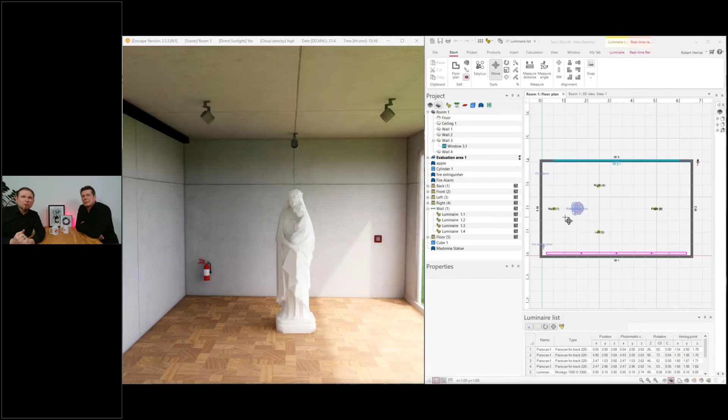In ReluxNet we have a 3D object catalog option, and this statue is from our ReluxNet 3D object library. So it's almost the same scene.

Here's a standard situation - in Relux 2D, we have on the ceiling 4 spotlights, and we have 1 light on the bottom. Let me try to show it to you.

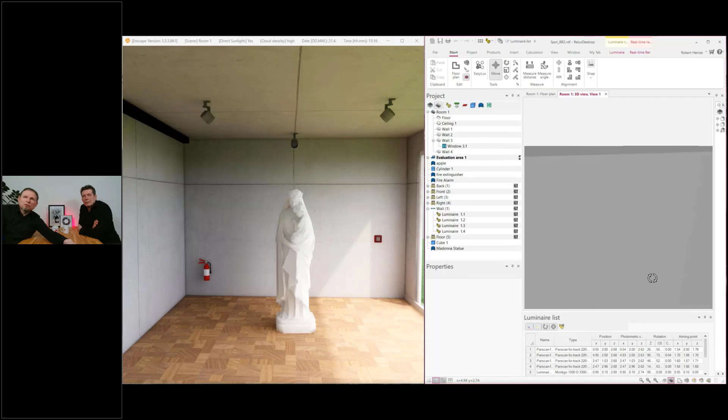It's not easy. Here we have a luminaire on the floor, also to show what happens if we have light from the floor. Mainly lights are coming from above, which is also a good choice. Here we can try out and find the best solution to illuminate and focus this statue.

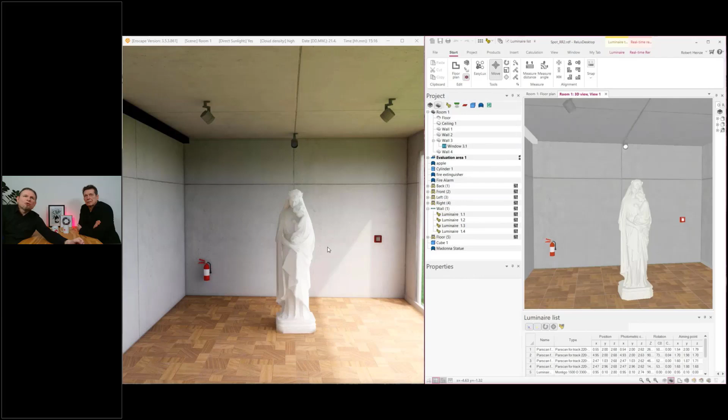So the job is to focus the statue. Before we go into this, here is the real-time rendering. You can enter real-time rendering in ReluxDesktop just by this button. Give it a try - it's free and it's fantastic, especially for these focused light situations.

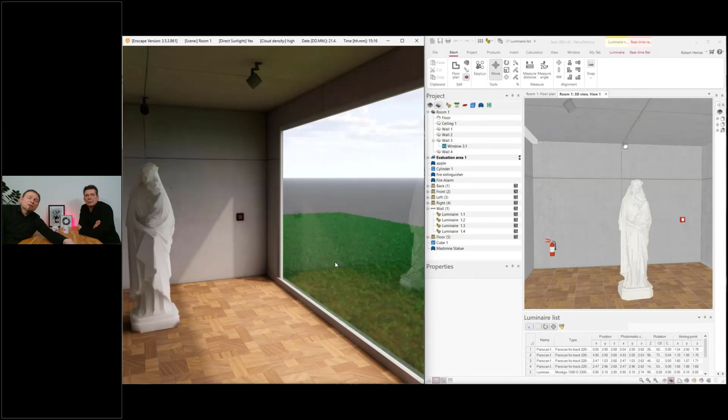If we want to start, we need to switch off the sun. The sun is one of the brightest sources ever, so it's really hard to compete against the sun with anything artificial - don't even give it a try. It's impossible to deal with sunlight. If you have daylight, it's impossible to make focused light.

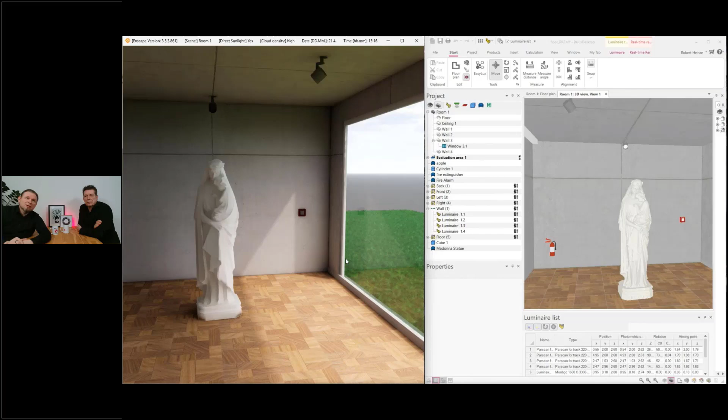Depends if you can shut down the natural lights, then you can have some effects. It's the same with projection and so on. The sun is just a really high source of light energy, which is fine in a lot of occasions, but to have contrasts, sun destroys all contrasts.

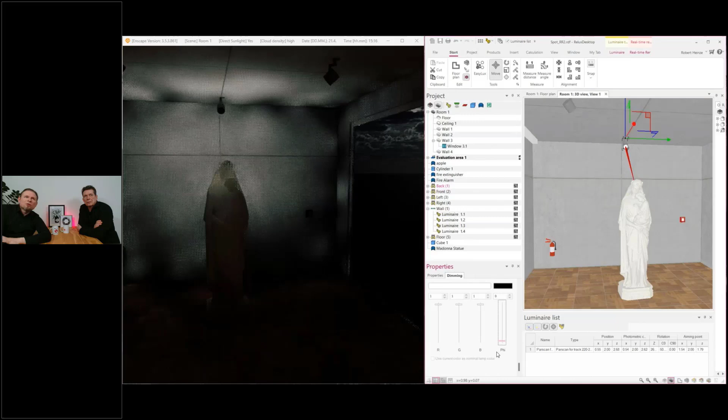Okay, I'll make it a night situation here. So now we have night, and we can also see we already have an active spot. I just want to go down with the spot and show you one spot after another. Now we have a beautiful night scene, which is good.

I want to start here in ReluxDesktop by showing you the options for what we can do with spotlights. Most of the spotlights come with some options to align, to adjust, to have a tilt and aiming - not just tilt, but orientation in rotation and tilt.

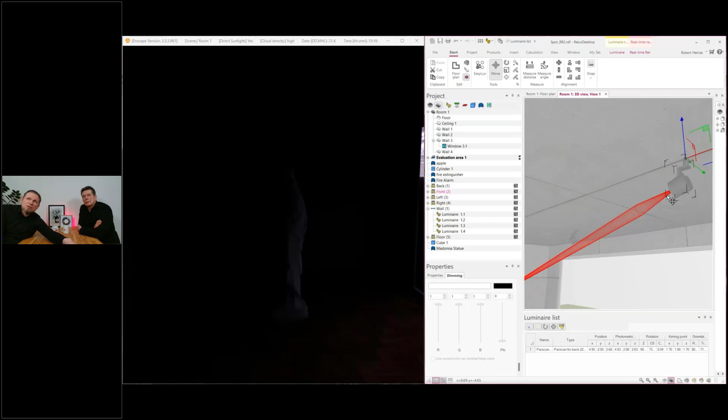So you need to adjust the luminaire with the spotlight, especially if you have sharp focused spots like I have here. This is one of the most sharp spots I could find in our ReluxNet library. I guess this is from Erco. This is about 2 degrees or something - really, really focused, really, really tiny.

And this is great - a tiny spotlight is fantastic if you want to have a focused, shadowish light. If you want to have high contrast and high gradients to the rest, then this sharp spot is perfect and casts a lot of shadows. You have more shadows with a tiny spot, a tiny source. If you have a big source, then you have less shadows.

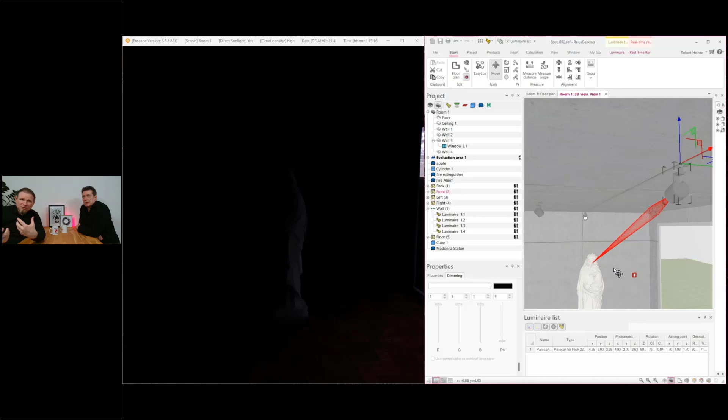And sometimes you want to have shadows. Shadows give a deepness of objects, bring objects into the 3D stage, make it plastic, more useful shape. With shadows, without shadows, everything is flat and boring and simple. Shadows are a kind of high contrast element you should be aware of when you're going to focus light.

That's why in focus light it's good to have as tiny as possible sources for the light. And the size of the opening angle depends on the size of the objects. So of course, if you have a tiny object, tiny focus, but it also makes sense to have a wider opening angle version if you have a larger object.

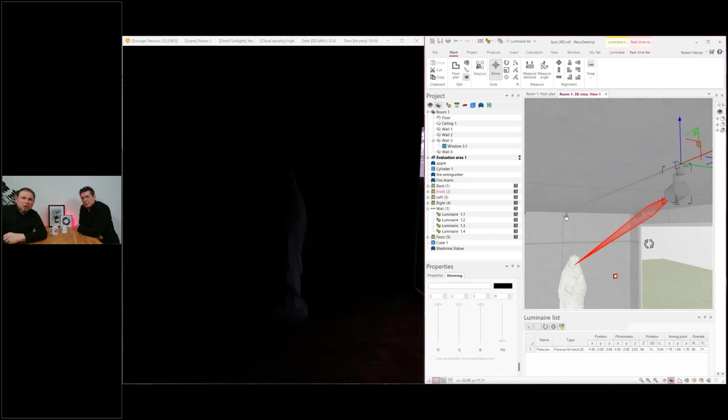And the distance also plays a role. Here it's quite tiny - this is one simple small room, and that's why a sharp focus is needed here. I can demonstrate more if it's sharp, if it's wide.

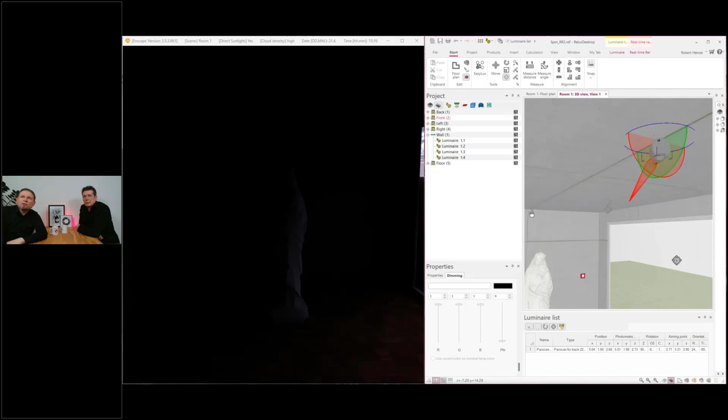Okay, then we have options here to adjust it. This is something really nice in ReluxDesktop - you have this aiming tool. If you select the luminaire, then you can literally aim the light, the focus. You can aim, for example, to the wall, to the ceiling. You just click where you want to have the focus, and then the luminaire - and also the geometry of the luminaire - follows what you want to highlight.

So, and you can also pick one of these and rotate it. It's not the best rotation I've done here. Yes, this is a better example.

Yeah, of course it's also here. And here we move the complete luminaire. This will break the luminaire here on this socket.

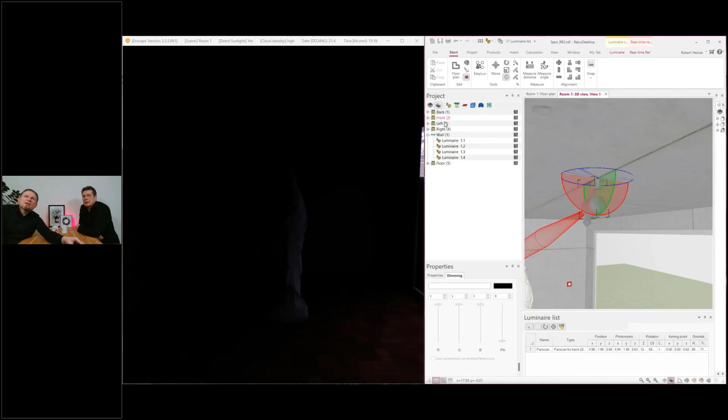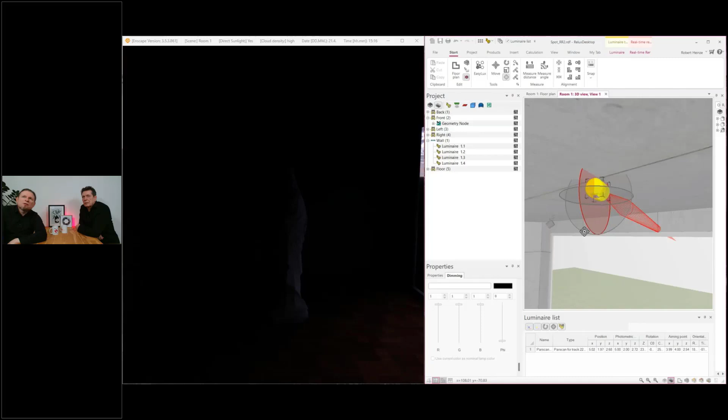That's why we need to switch this one, or here I can also select directly the head of the luminaire and manipulate it here directly, just the head without the arm, let's say. And with this focus light element, it automatically makes it just rotate what is possible to rotate - just the geometry, just the look of the luminaire.

But of course, if you have an aesthetic room, it's also important that you have an aesthetic rotation and tilting of the luminaire according to the geometry options of this. So, okay, but let's focus again on the statue.

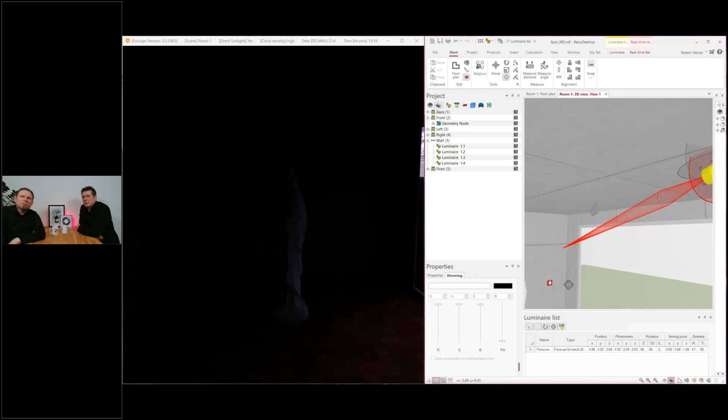Something like this. Okay, there's also tons of options in regard to displaying not just the LDC, but also aiming arrows. This makes sense in a lot of occasions.

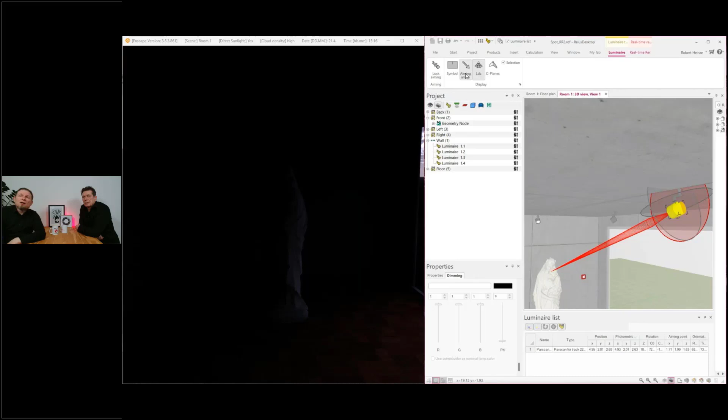Also, you can adjust the LDC a lot. It doesn't have to be this LDC. You can also adjust it in the settings - what is the size about this? So there's a lot of options. I will not go deeper.

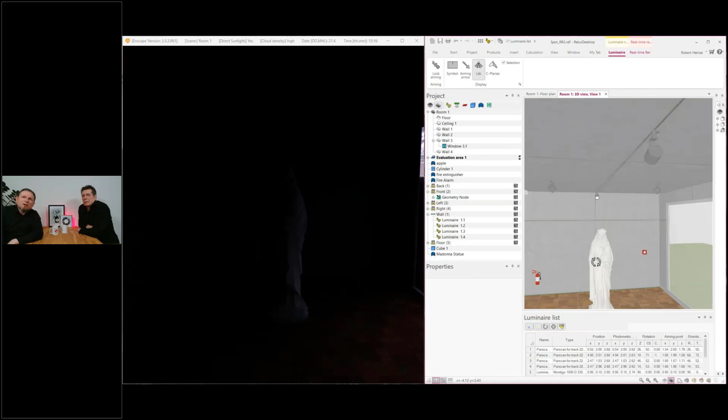Maybe Klaus has some time to show you a bit about the aiming options. I want to concentrate here on what the direction of light has, which kind of focus. And I can really recommend a book if you're interested in shadow, in direction of light. There's a book from the manufacturer Erco called 'Handbook of Lighting Design' - quite a generic title. This is an older book.

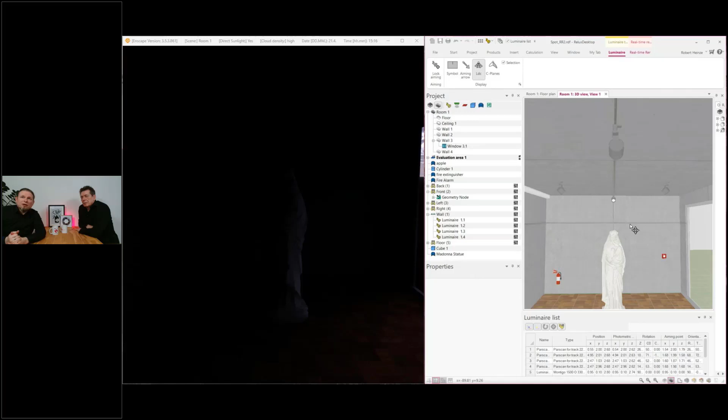It's not available anymore in a print publication, but it's available on the Erco website. There's an option to download the PDF of this book for free. You just need to sign in to Erco, and it's also free. It's available in English, Spanish, and German. This is one of the best sources I've found regarding focused light, directions of light, and the effect of different light positions.

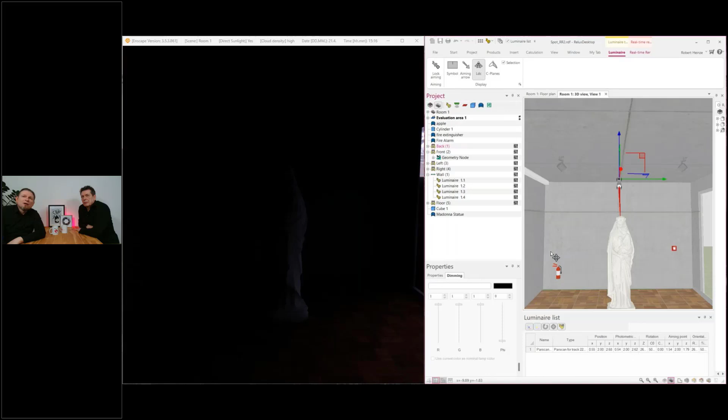Let's start with investigating different directions of focused light, beginning with the back. With light from the back, you can't see the front directly. You just see some aura, something in the way, a cast shadow, but you cannot really recognize the face or front. You see something with an aura, a glimpse between the shapes, and this is something mysterious and unknown, not really recognizable. This isn't used quite often, but it's an element worth considering.

Back light combined with a back spot helps a lot to make the object more plastic, more 3D. If we turn it up more, we see more back spilling, more indirect light, and more of the wall on the back. One option is to eliminate the wall on the back, which has a similar effect but without the strong shape on the edge.

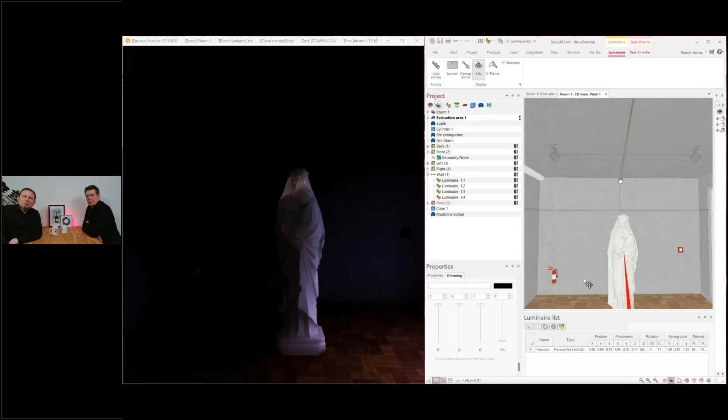Then I have one luminaire from the floor, so light from below. Below is something really weird. If you switch it on, light from the lower part feels unnatural. Light usually comes from above, from the sun and sky in diffuseness. Humans are used to that. If you have focused light from below, something feels wrong, not natural. It can even horrify or scare people, especially with faces, since light from below looks strange and not real.

You may have seen this before: taking a flashlight and holding it below your face to horrify children on Halloween. You get a spooky face with focused light from below, with cast shadows in the face. It's not really visible well here because the face is too far away and the angle is too flat, but with a stronger angle from below, you get more of that spooky effect. Combine it with green light and it's really spooky. This isn't commonly used, partly because it's awkward to install something on the floor, though it does help prevent some shadowing. Light from above is more common, especially with a front luminaire, which is the straightforward situation to illuminate.

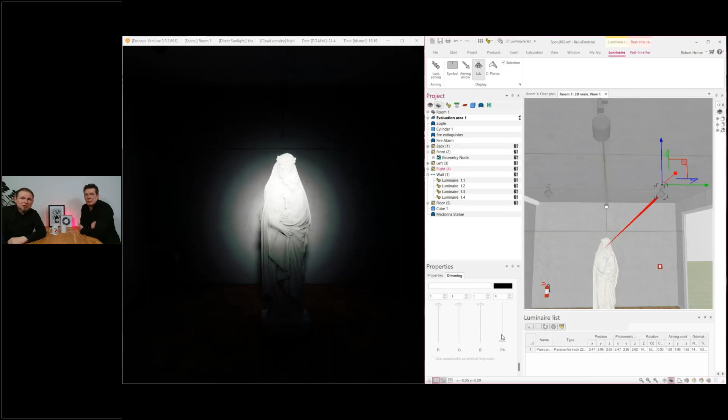It can be just flat and look simple, not really three-dimensional. This can be helped if we add some lights from above, from the sides.

So this is also quite common, especially on statues, on faces, that you have some light from the sides. I will turn on lights from both sides—this also helps to prevent shadows. Maybe it's a bit too strong, so I'll also turn the front off. Now we have just lights from the sides. This makes objects more plastic, more dimensional.

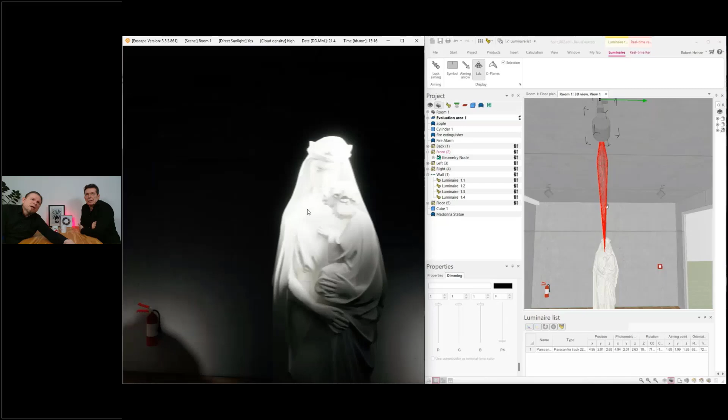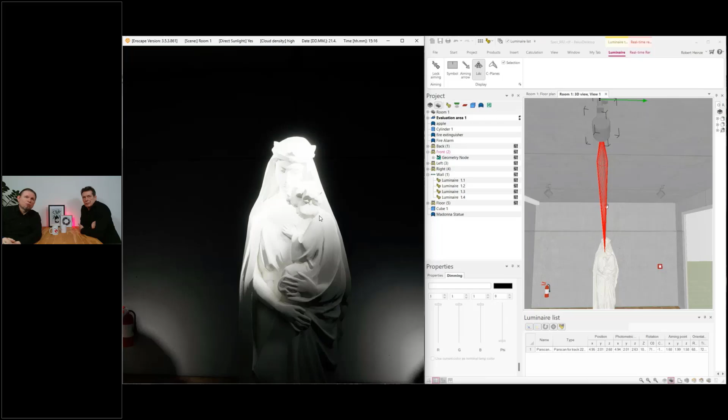We can see different kinds of shadows. We have not just one shadow, but a mixture of different shadows overlaying each other. If we combine multiple spots from multiple directions, this makes the object more plastic. We can really see all the tiny aspects of it, in contrast to just one source of direction, which makes the object more flat.

Maybe I can show this by bringing back the front a bit. You can see it's now more boring, more flat. If I just put the front on without the sides, it's hard to see—maybe it's another kind of shadow from the front. So if you have issues with shadow, if you don't like shadows, combine multiple directions of it.

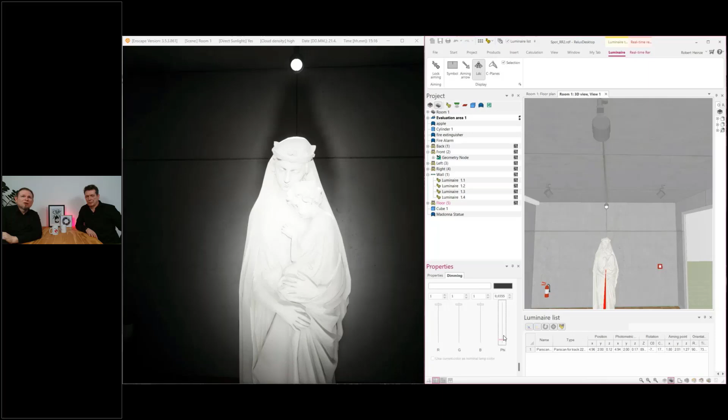But this is something you need to adjust on-site, which you need also to dim on-site. This is just a rough estimation in this visualization—it's not the real world. So you cannot take these dim values on-site and expect the exact same effect. This doesn't really work; you have to do it on-site to dim, to steer into the situation you want to acquire.

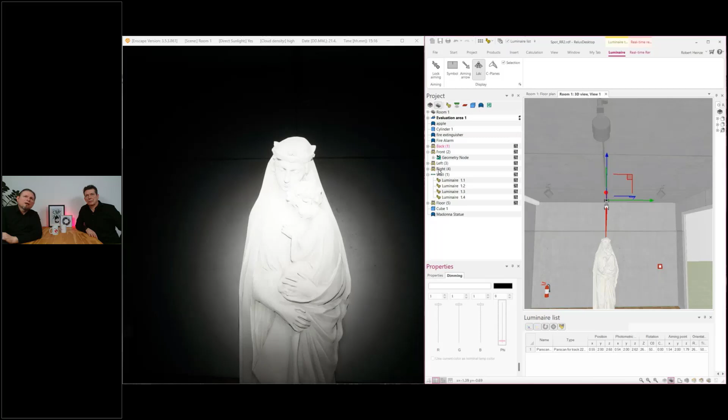What is also possible in RELUX is to colorize. I want to do this just roughly, maybe with one light—let's take the front one and make a color of it. It's possible here to dim, though I guess not directly here—we need to change the RGB slider. Okay, now I'm in the mode, and now I can pick a color.

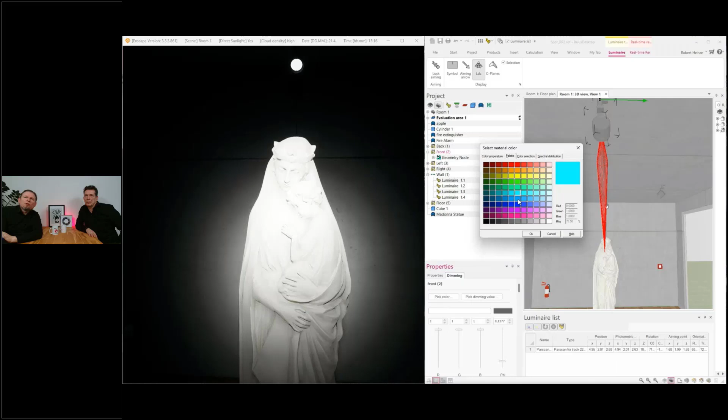Now I want to find where I can do it—it was working before, now it seems... okay, sorry, it's just on the other screen. This is what I was searching for. Here we can set a color temperature to it, maybe more warm whites, or a specific color, also in spectral distribution, and put it to it.

And then you can also try to work with colors. This is a bit advanced—I would not recommend doing any colors. It's really hard to deal with colors in an aesthetic way. Let's keep it short—it's quite powerful.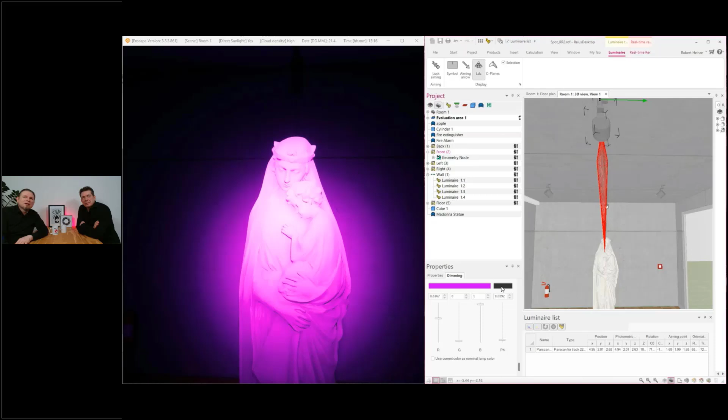So be careful. Do it here in the background—on the background it's something different. But if you make a focus spotlight with color, be careful, it's powerful. You can do a lot, so do not mix up too many colors. Stick to one, just some simple warm white or cold white.

It's mindful enough. Okay, this is the situation with focus light, and of course in contrast to focus light there's also diffuse light, so it makes sense to add a bit of diffuse artificial light into the room to see the rest of the situation a bit. This is something where you can play with the contrast, how much focus you want to spread, and this is more fun if you have multiple statues—you can say, okay, I want it equal, or have a highlight on one statue, whatever.

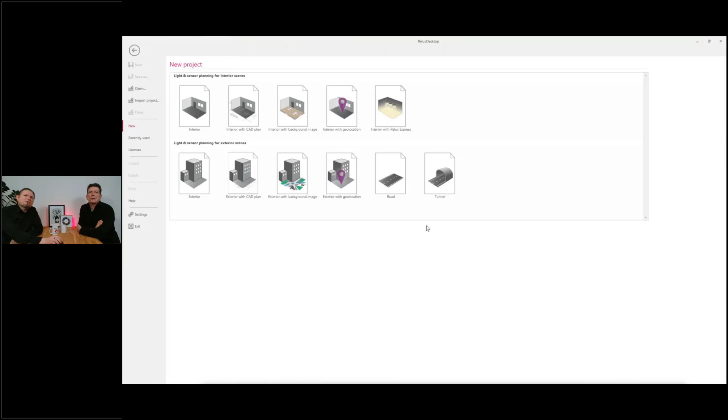You understand the story, okay. Good, enough time for indoor—let's move to an outdoor scene. I'll help Klaus by opening up the next file we have for you. Just want to show the situation when we are here.

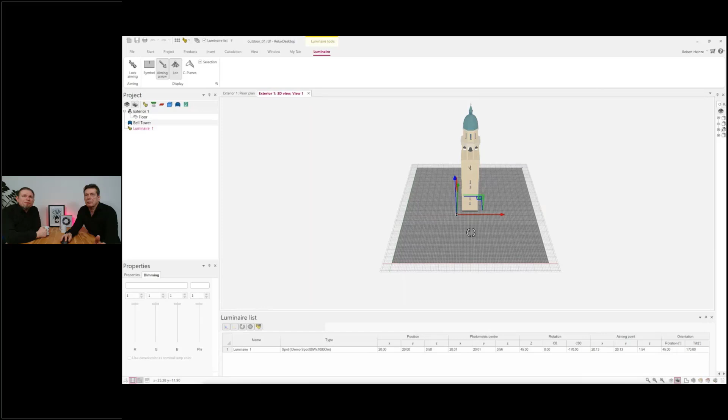From help, here you will find the sample projects Robert told you about before. From here you'll find the spot, the one which Robert has shown before. But now here we are in an exterior scene. I have a simple object here which I downloaded from ReluxNet, an architectural object. We have some in our library on ReluxNet, but you're also able to download any kind of 3D model, or construct complex models of buildings or facades inside Relux. Everything Robert told you before is also valid for exterior scenes.

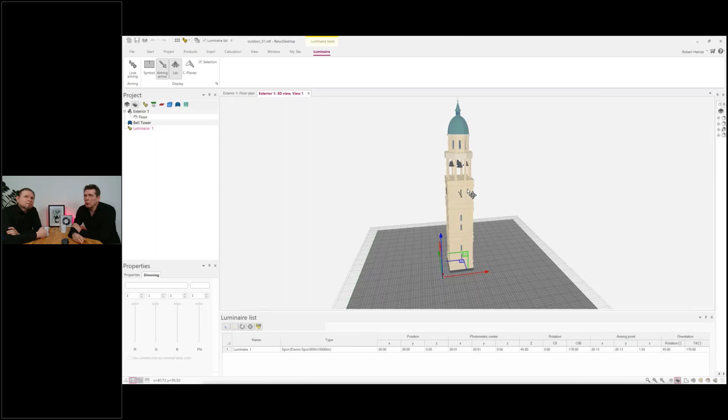There's not really a difference about these rules and possibilities for aiming and controlling the luminaires. I first want to show you, or remind you of, another feature inside of Relux: the mirroring groups.

We normally use this in exterior lighting for sports places or similar situations, but it's also useful for focused light or illumination of facades and buildings.

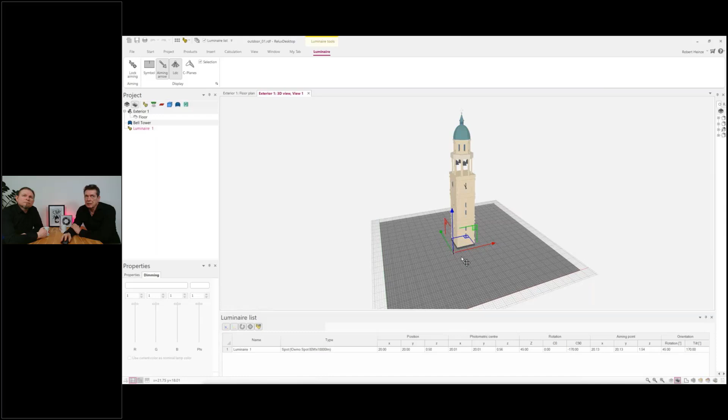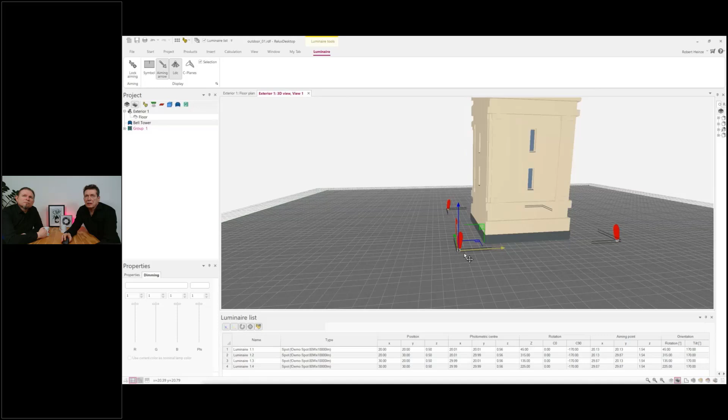For that, I will now create a mirroring group around my tower, around my bell. This has the advantage that I can simply change the tilt angle - that's the properties, not the dimming.

You have the possibilities here too. When you go down, you will find the option for orientation, rotation, and tilt. This has the advantage that, as you've seen before in the interior scene, you have different levels - the highest being the mounting level, so you can install your spotlight on the ceiling or floor, and adjustment happens via inner rotation of the luminaires. This is handled automatically in these controls, which is the advantage of using them.

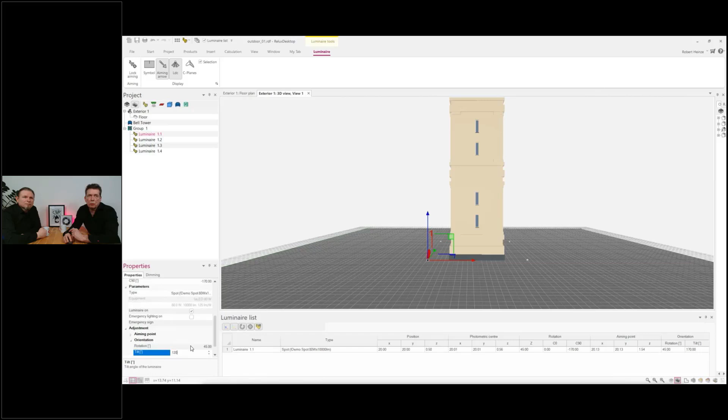Now the advantage of this mirroring group is, for example, I'll do something extreme: I change this to 120 degrees. You'll see that all the other luminaires around in my mirroring group now have the same tilt angle, so it's easy and may be helpful in some situations, also for focused light. I'll switch back to the angle before, 170.

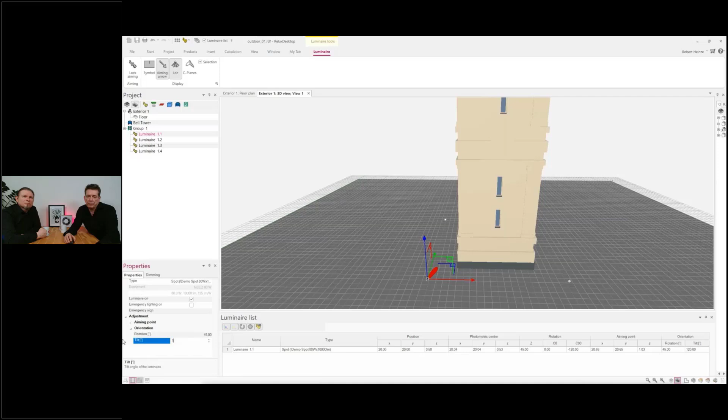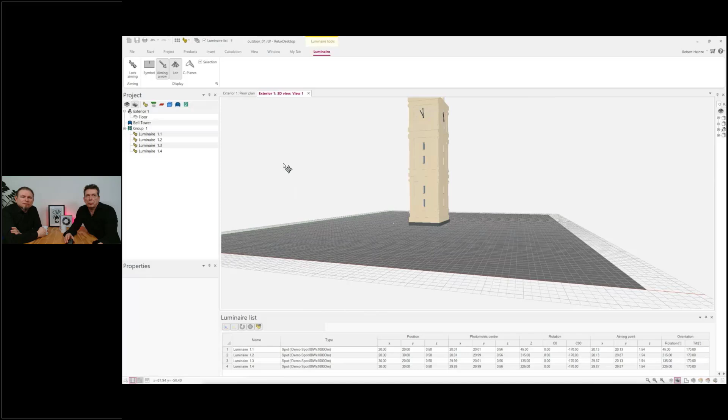There's also a minor issue here - not really a problem - because we are shooting into the sky, so the size of the LDC and the arrow is limited. You have the possibility in the properties of the 3D view to change this manually if needed. If you're inside a room or hitting an object, there's an option for the size to be calculated automatically.

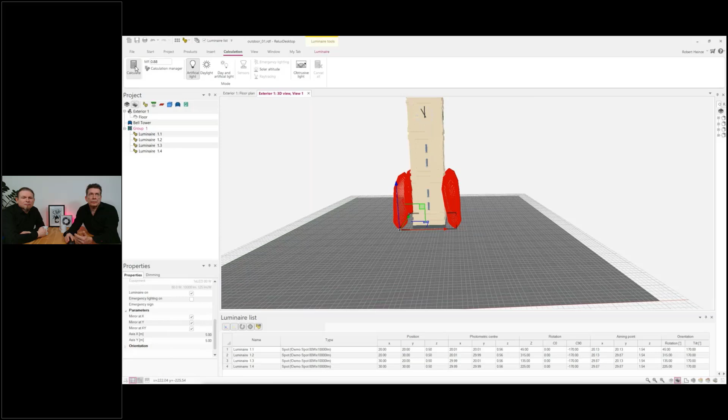If I now run a calculation - it's running on another screen. Now it's done. We will see the results of the symmetrical illumination. We can also see the 3D false color values, which give us an idea of the levels in each part of the room. We'll also see that for really good illumination, some light at the top may be missing, so this is related to the design.

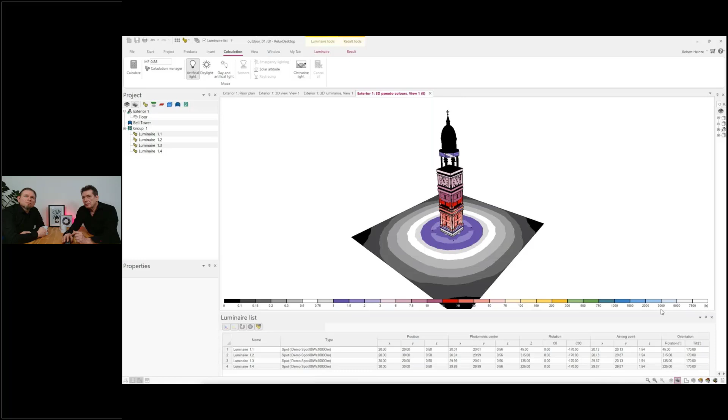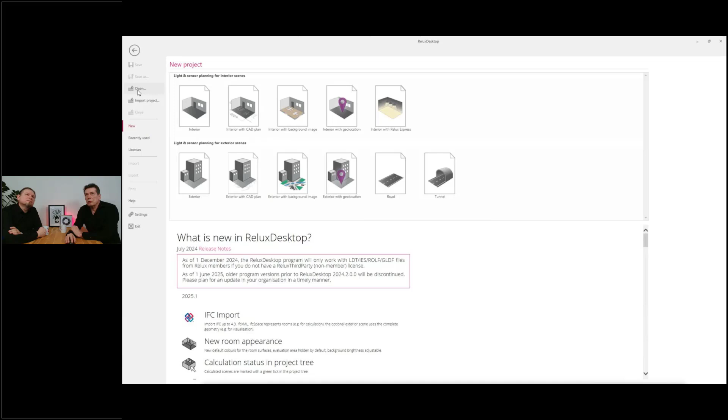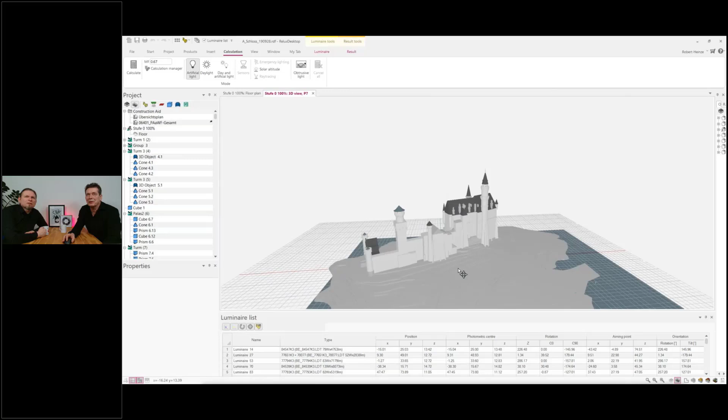Now I want to show you an exterior scene, with a big thank you to the planning office Bamberger Ingenieure, who gave us a project we can use. You may have seen it when starting the latest version of ReluxDesktop in the pop-up screen - a picture on our splash screen of this castle. It's very famous - this is the most famous German castle, Schloss Neuschwanstein in southern Germany. This was planned by Planungsbüro Bamberger, and thanks for providing this model.

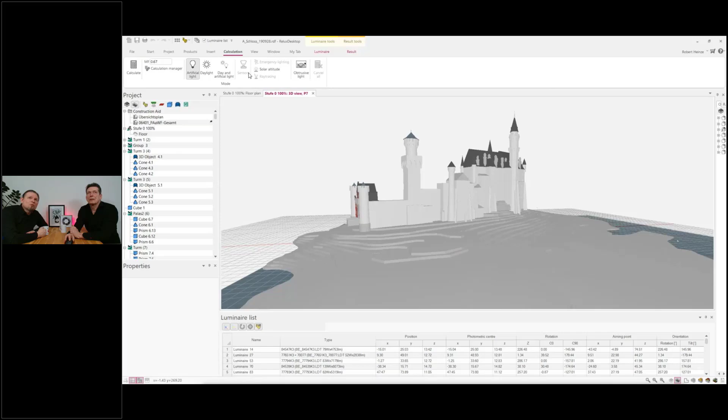This is constructed, as we can see, really just in ReluxDesktop with 3D objects. It seems so - great work so far.

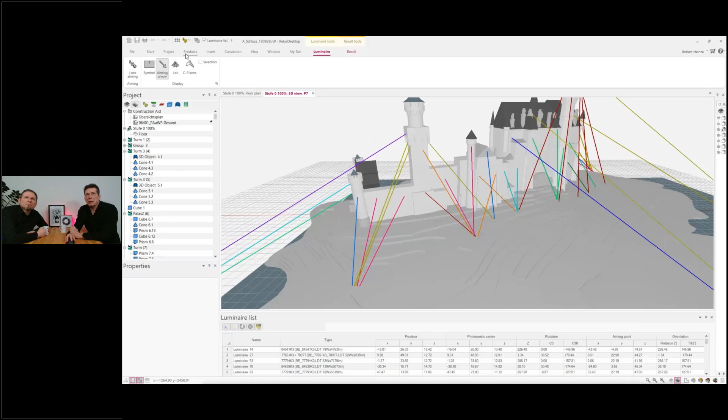Here we now see a lot of focused light on this complete building. This is also helpful because, depending on the product being used - and there are a lot of products in it - you can define for each type of luminaire the color of the arrow, which is very helpful when working with more complex scenes. We also have the possibility to adjust the arrow related to the LDC.

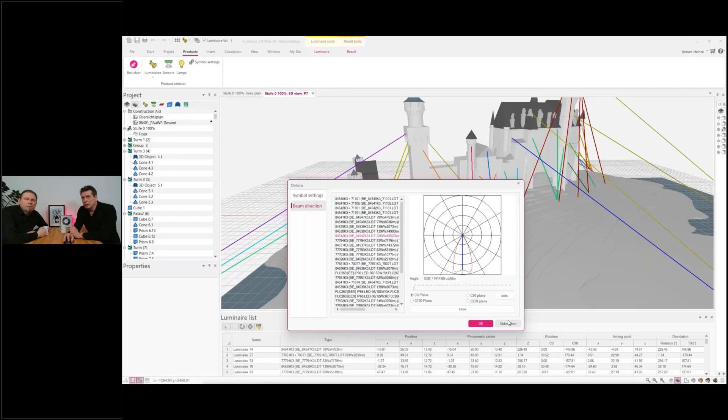This is especially important when working with asymmetrical floodlight. Normally it's just Imax, so the maximum, and the program will automatically find the correct value. But in some situations it might be helpful to know there's a point where we can change it.

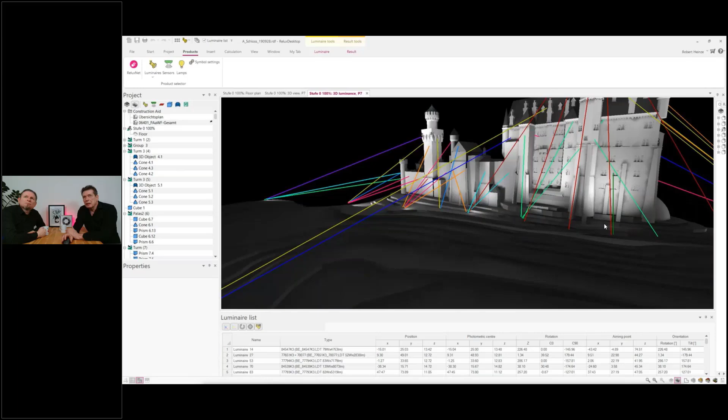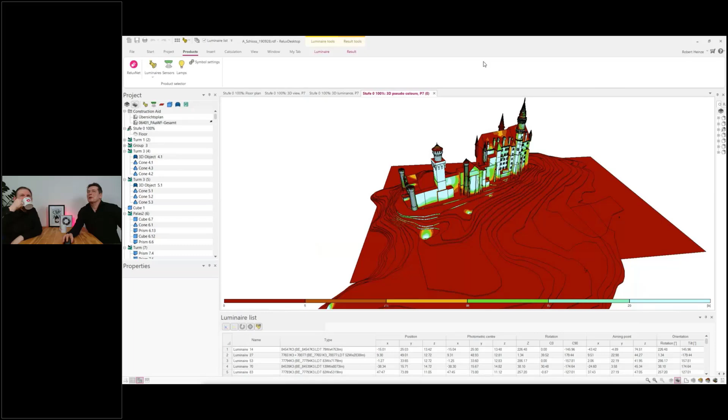If we take a look now, this is the view in ReluxDesktop with the radiosity calculation. We can also check the results in 3D false color - looks like really classical false colors. It's not our new false color scale, but I guess it's stored in the project. We can also use the more modern style.

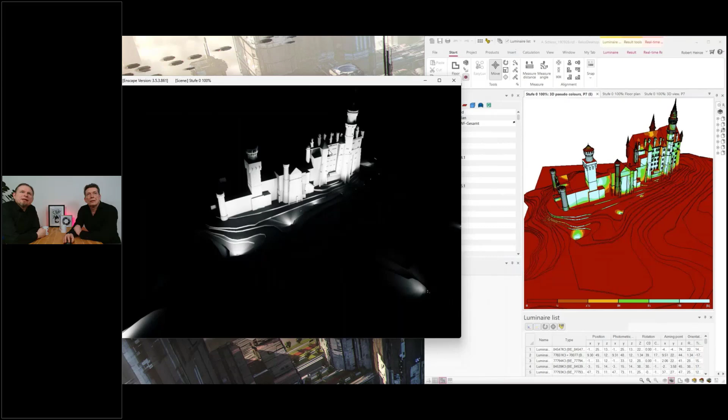At least we have the possibility to show this in our real-time renderer. No, the eye, here, this is - yes, we're normally - the ribbon is squeezed. And then we have here - no, not zooming, it's away, or take the camera from here. So I'm a little bit more - yes, and you will see that it is also used here.

Daylight is here. Can you search? You need to activate it. So then we can also switch here to a daylight situation so you have seen the effect of it. You can see the sun is the biggest spotlight.

It's impossible to deal with daylight. Even if you have strong spots, strong luminaires, the sun always wins. And of course you have to think about, especially in situations where you light up, obtrusive light. This is something where you have certain values you need to cover, not to spend too much energy to the sky. This is a general problem in outdoor lighting with focused lighting, illumination of facades or buildings. It's always in conflict with the interests of obtrusive light and clear sky or dark sky targets.

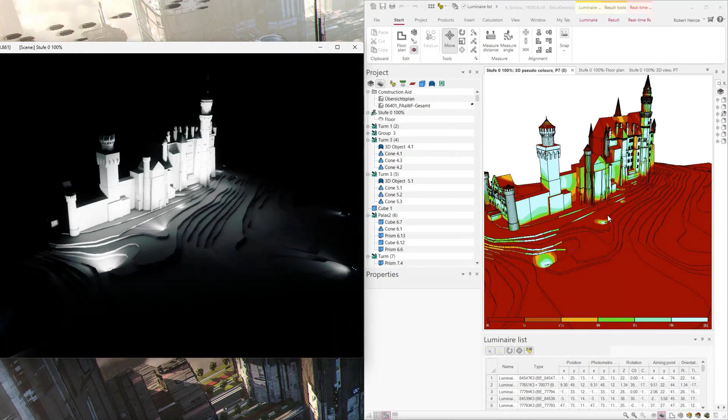Oh, I can see we have also a technical issue. Maybe you can hear us but not see the latest screen, but now you should see us again. Okay good, down to the questions.

Can we have objects, brackets, tracks, connectors, specification list in report? It's often used in illumination projects. This is, let's say, a gray area between luminaires where we have, of course, bill of materials, and objects like furnitures, which are also in a way displayed, but not in list of materials. This is a gray area, I have to say.

We already have it on the feature list, but actually there's not really a solution how to handle it. Most users put in tracks, mainly continuous line tracks, as an object, and it's also possible to count the objects and to display them, but there is no listing of the furnitures used in a project. This is not really handled well, but also not so easy to say okay, we need to specify a new category of objects which has certain properties like brackets, connectors. This is not easy to do for the user and also for us to program it.

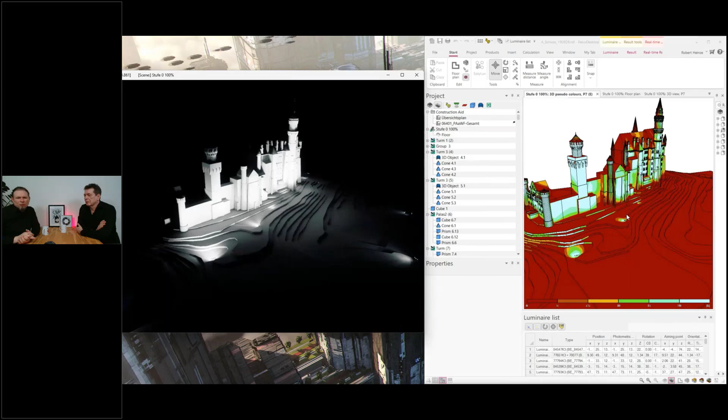So this is also a good example, and this is the only really public example, I have to say. The rest of the samples we have are not to disclose in a way - this is something where we don't have the copyrights to send it out.

But you can ask, of course, Bamberger, Planungsbüro Bamberger, maybe to help you. They have also an interesting website with a lot of interesting outdoor lighting design projects, and there you can ask the guys directly. Maybe they also share it with you, but not to the public, I guess. You will find on our homepage, relux.com/blog, a short article about this project, and also a link to Bamberger Ingenieure.